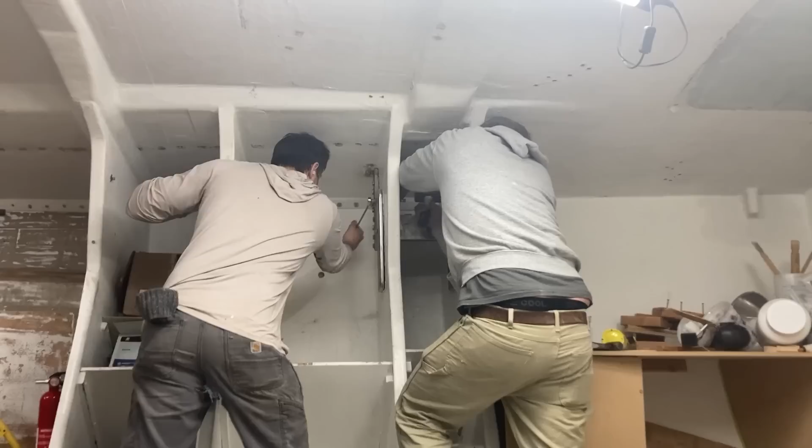A few months ago, we removed the original chain plates. These were giant, heavy stainless steel plates that supported a very heavy mast. Nice job. That mast was lost at sea almost 30 years ago. It was very stout, built for racing Duracell hard around the world in extreme conditions.

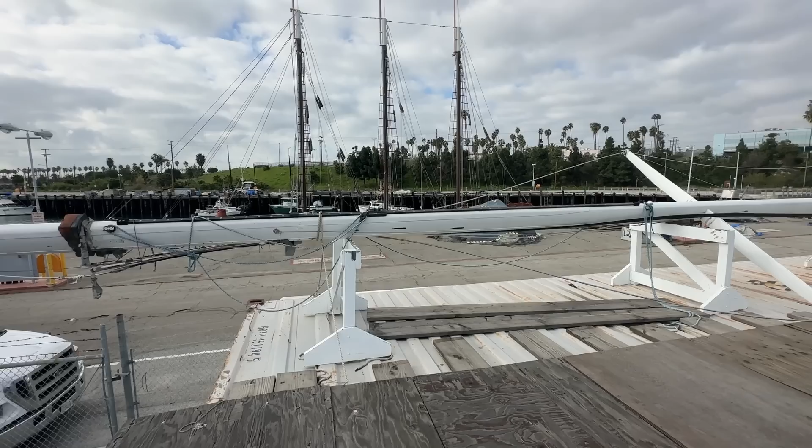Now we've bought a new mast for Duracell. This mast is about 50% lighter than the original mast was. This means that the walls are thinner and the section is smaller than the original mast. So we need to make adjustments to the rig to make it stronger.

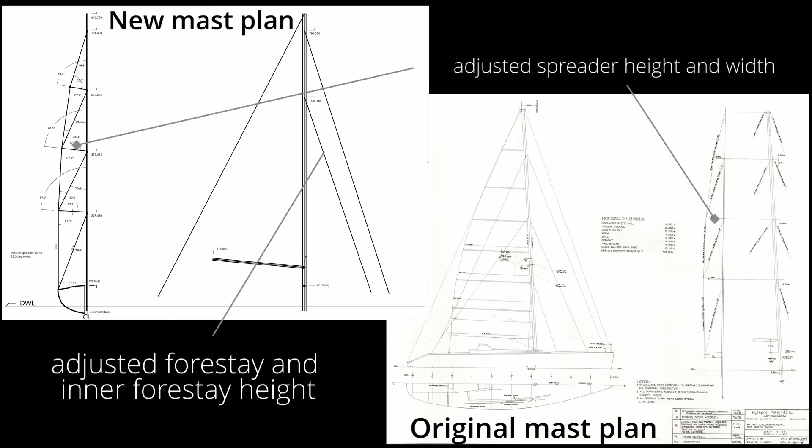Later, when we start working on the modifications that we'll be making to the mast, spreaders, and rigging, we'll get into the specifics of how we're making the whole thing stronger. For now, we're going to just talk about how changing the placement of the chain plates will help make the mast more sturdy in the boat.

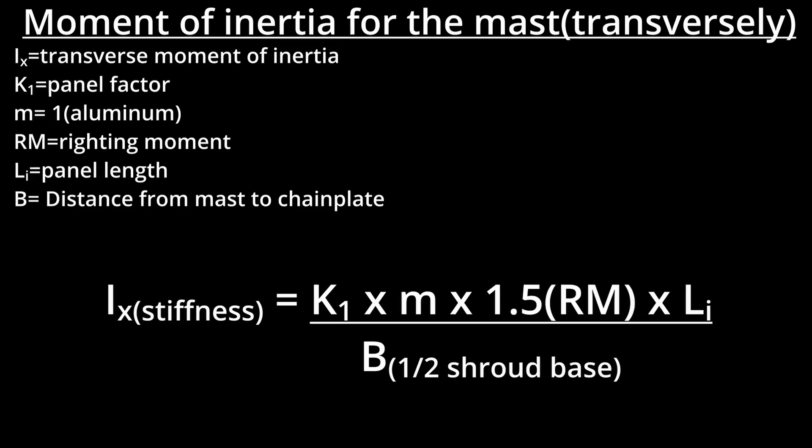To figure out how strong or stiff a mast needs to be, one of the factors is the distance between the center of the mast and the chain plate. In this formula, which calculates the area moment of inertia of a mast, the B distance is the divisor. So obviously as the B distance goes up, the required area moment of inertia or stiffness of the mast goes down. So by moving the chain plates as far outboard as possible, we are essentially making the mast more stable without increasing the weight of the mast.

This is the position of the original chain plate, and we are moving it outboard to the rail. By increasing the shroud base, we are making a compromise. We will lose the ability to use a genoa for hard upwind sailing because the shroud base will be too wide for a sail to pass by for a good upwind sheeting angle. So instead of using large genoas for upwind sailing like this, we will be using smaller, easier to tack non-overlapping jibs like this one.

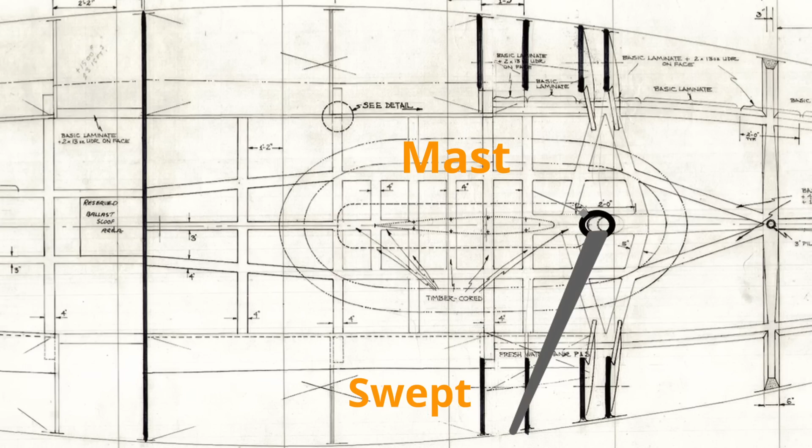And not only are we moving the chain plate outboard, we're also moving it aft. This means we are changing the mast from an inline orientation to a swept spreader rig orientation. The spreaders on the original Duracell mast and the spreaders on the new mast were both inline and very similar dimensions. In fact, it would be a lot easier for us just to stick this new mast in with its original spreaders, in the same spot as the old mast.

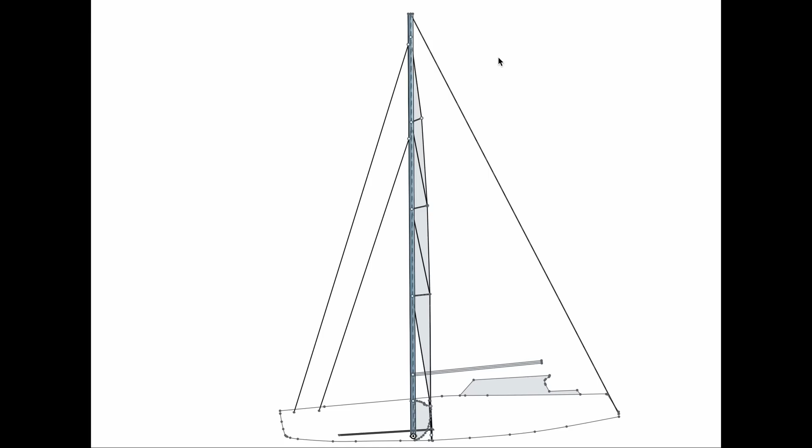But having inline spreaders with a mast this huge requires that we use runners to keep the mast in column. That would mean every time we tack or jibe, an extra step has to be done in the cockpit to release the old runner and take on the new runner. And in really heavy going, doing this wrong could essentially mean losing the mast. By sweeping the spreaders aft, we are basically changing the shroud base to more of a tripod, and this permanently stabilizes the mast aft so running backs won't be necessary.

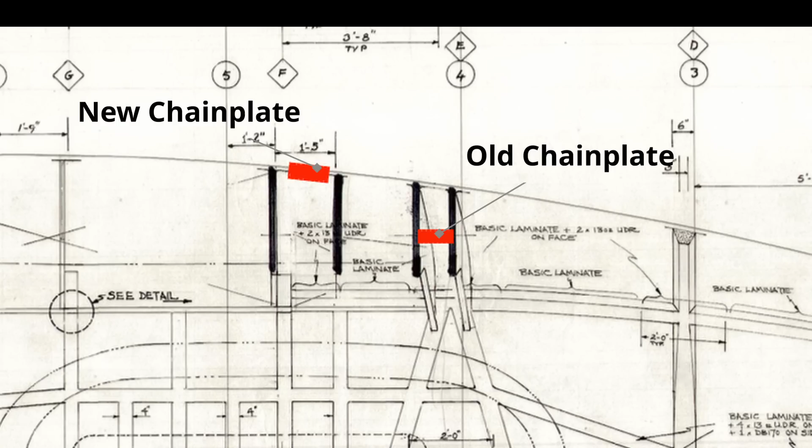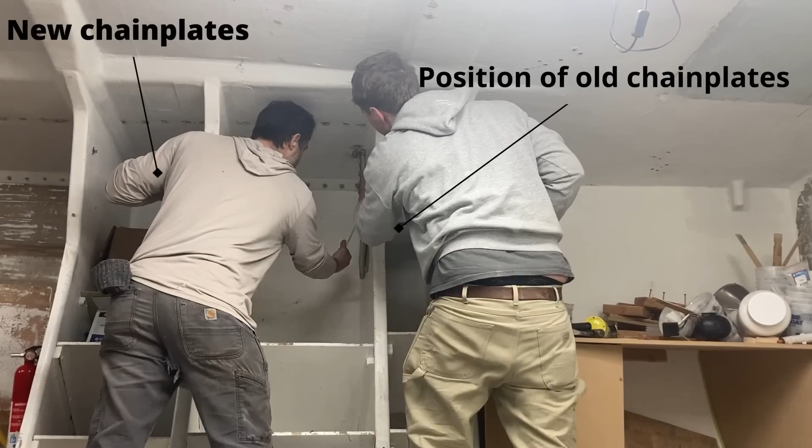So, we're building chain plates that are as far outboard as possible in the most reasonable part of the boat's existing structure. There are already 2 ring frames that are a perfect place for the chain plates to go. And no, we're not casting our own new stainless steel plates, we're building carbon fiber chain plates.

Now if that was too in the weeds for you, no worries. The short of it is that we are going to be doing a lot of work to modify the mast and the chain plates to make them stronger, lighter, easier to maintain, easier to use, and ultimately safer.

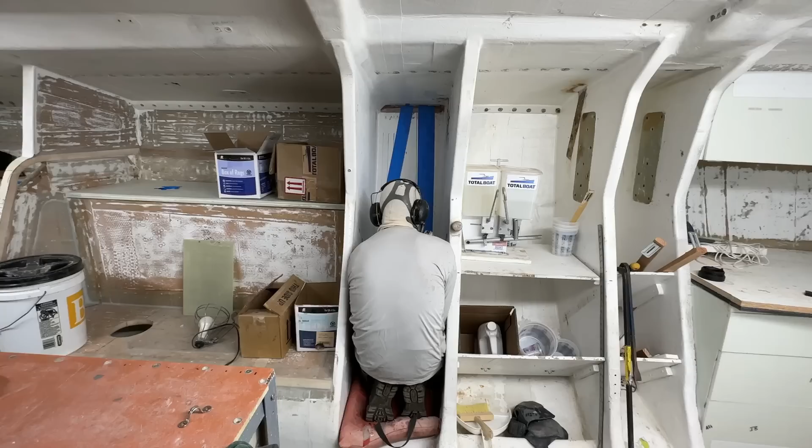Tonight, finally, I get to do some invasive surgery on the boat, something I've been planning for a long time. The hull of Duracell is sandwich core construction, which means that there are 2 layers of fiberglass separated by foam. At the area where the chain plates will be installed, I'm going to change the hull to be a solid fiberglass. So I have to peel off the inside skin of fiberglass, exposing the foam, and then remove the foam so that we can laminate a whole bunch of fiberglass.

Okay, so I've cut around the perimeter of the inside of the area, just through the inside skin, and so now I'm going to be attempting to peel off this inside skin of fiberglass, or peel it off from the foam.

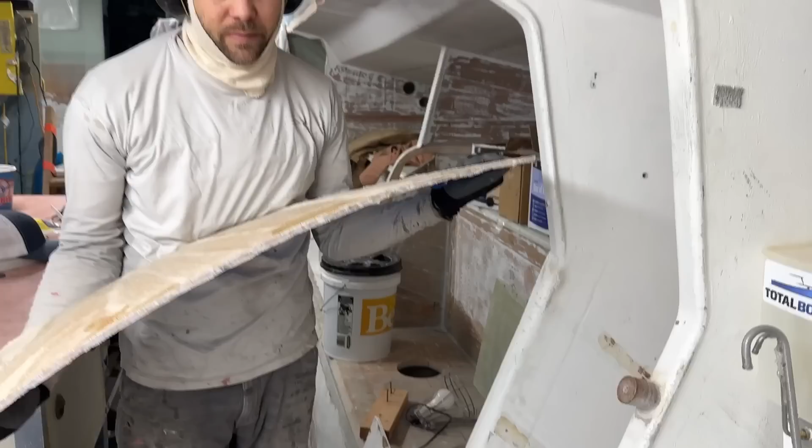Well-built boat if you can't tear it apart that easily. Yeah. You did it. Sweet. Victory is yours. That's right.

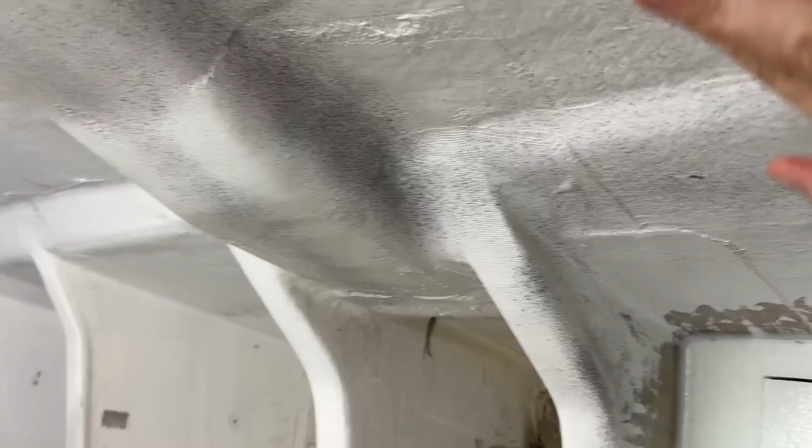I feel like we need to assure Duracell that this is all for a good cause. This was very invasive for Duracell. Yeah, it is. It is a very invasive surgery, but in the end, it will be stronger. It's okay, old girl. This is for a good cause. This is for your new mast, so you can go sailing once more. Cool.

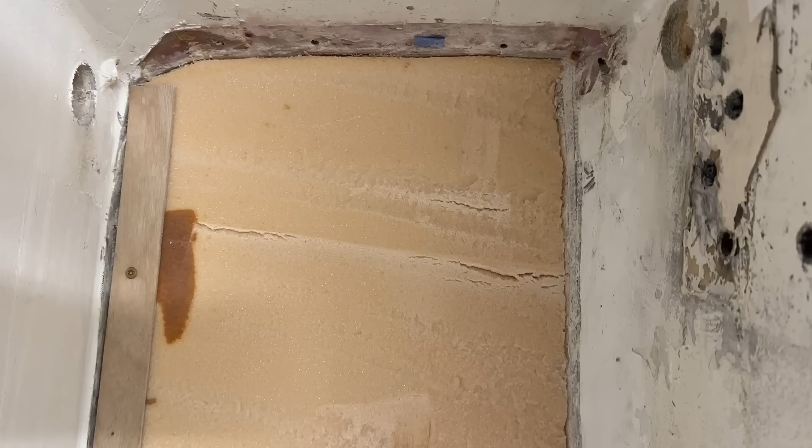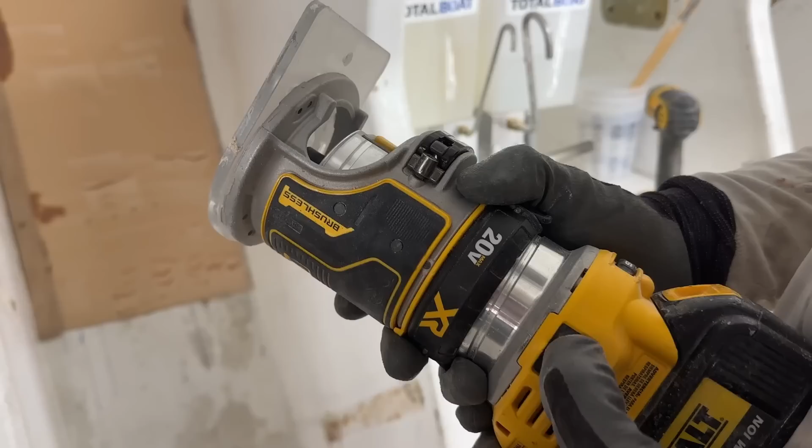Last night we cut off the inside skin of fiberglass and then peeled it off, and so what's remaining is the foam core, and then there's the fiberglass skin that's on the outside of the boat. And so what I have to do next is remove this core. This boat is built with sandwich core construction, so there's fiberglass on the inside and the outside separated by a layer of foam. This foam is 1 inch thick PVC Airex foam is what it's called.

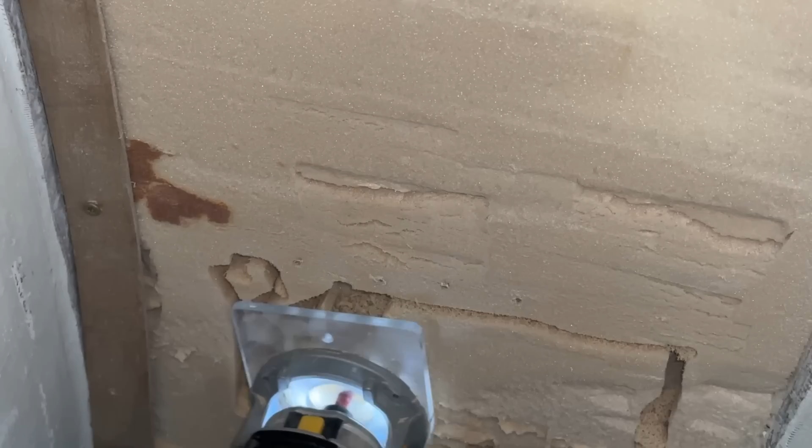So I take my router and I'm just going to buzz around and try and get as much of it out as I can with my router, and then use the chisel to get the rest of it out. Move on to the next section.

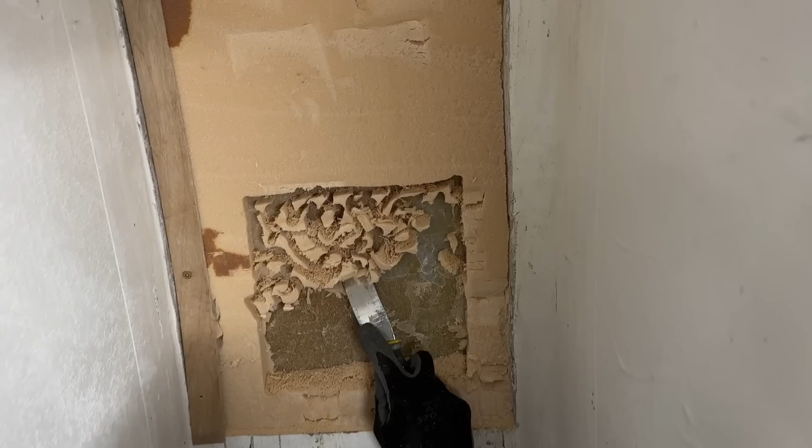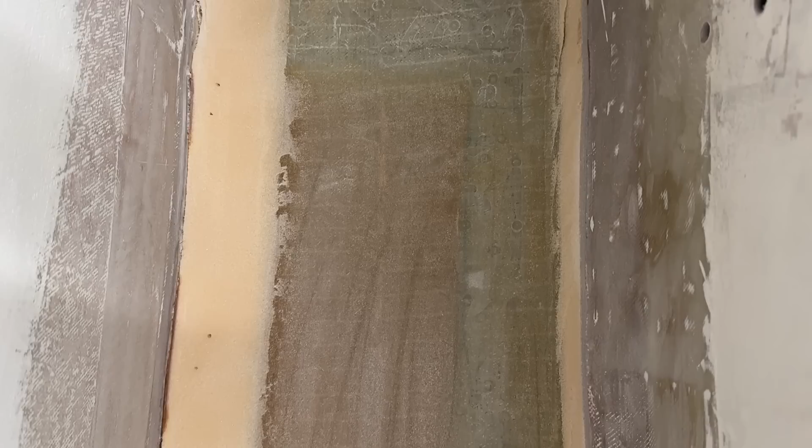So I use my router to get the foam out. What I've done now is I've shaped this foam that's left here, and what's left is tapered so that it will help transition the new fiberglass that's going to be laid in there from the hull skin on the outside to the ring frame. And so the next step is to build up the thickness of the hull to basically connect the two skins, the inside and the outside skin, together to make the hull solid fiberglass between these two ring frames.

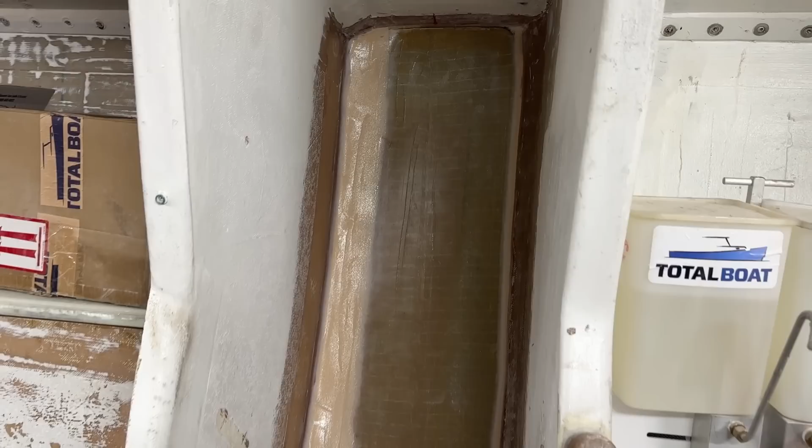Okay, so we're ready to do this first lamination. What we're applying is 15 layers of fiberglass to this outside fiberglass skin of the hull. As you can see, we've removed the inside skin, removed the core. We've shaped the remaining core that's there to transfer fiberglass from the outside skin to the ring frames. And I've swept it with thickened epoxy. And so it's all ready to go.

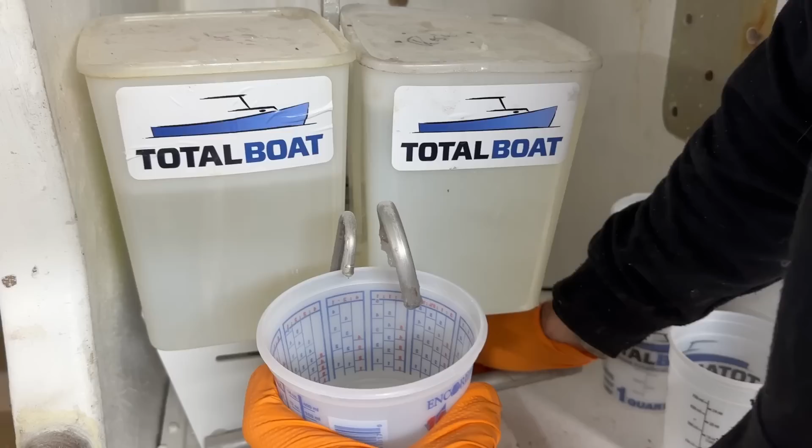15 layers is a lot to put on. The risk is that with 15 layers of fiberglass, it's so heavy that it starts sliding down the inside of the hull. And so what we're going to attempt to do is squeegee as much epoxy out of the fiberglass after it's been absorbed, so that it's as light as possible. There's a chance that we get halfway through and we decide that that's enough, and we put the vacuum bag on it and then do the rest of it tomorrow.

So my mom is here to give me a hand. Thank goodness, because it's really good to have 2 sets of hands for this one especially. Yep. So, yeah, hope it goes well.

Do you think we'll set the record for most epoxy used yet on a sailboat in one day? I don't know. When we did the roof, or, I just lost count, sorry. When we did the roof or when we did the traveler bulkhead, those projects used a lot of epoxy as well.

The process for this project was to wet out 2 or 3 layers of fiberglass on the table on top of each other with the squeegee. Then we'd lay a piece of thick plastic over the epoxy absorbed fiberglass and press as much excess epoxy out of the fiberglass as we could. The plastic helps hold the shape of the fiberglass, since biaxial fiberglass tends to warp really easily. Then we'd pull the laminates with the plastic up all together, again so that the fiberglass holds its shape, and then stick it up in position.

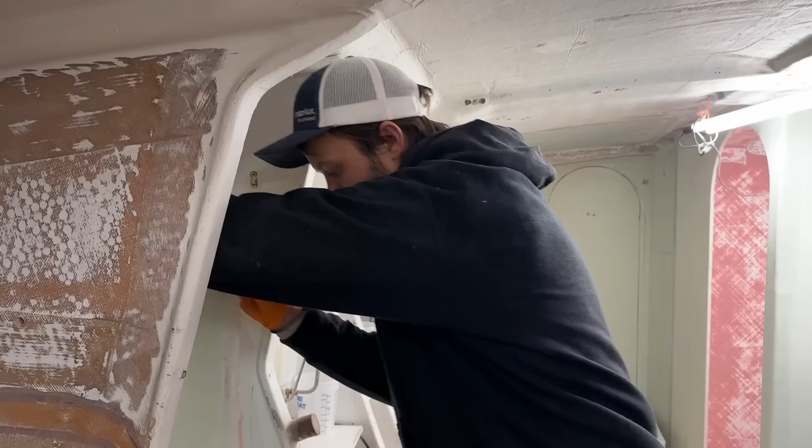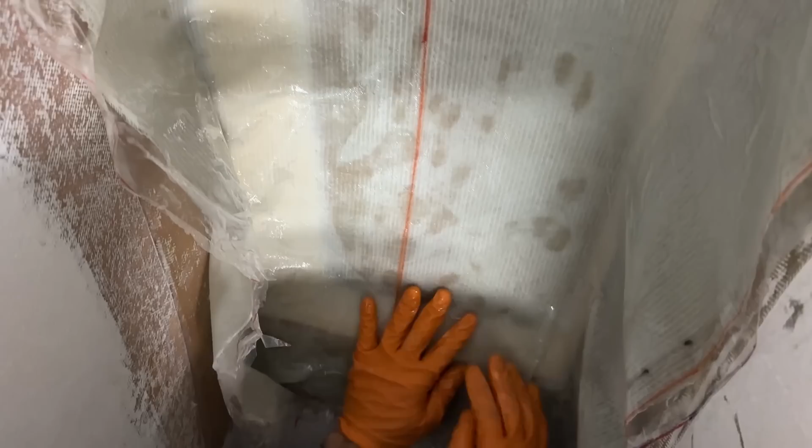Then I'd pull off the plastic to be reused on the next layers and roll out as many of the air bubbles as possible before moving on to the next layers of fiberglass.

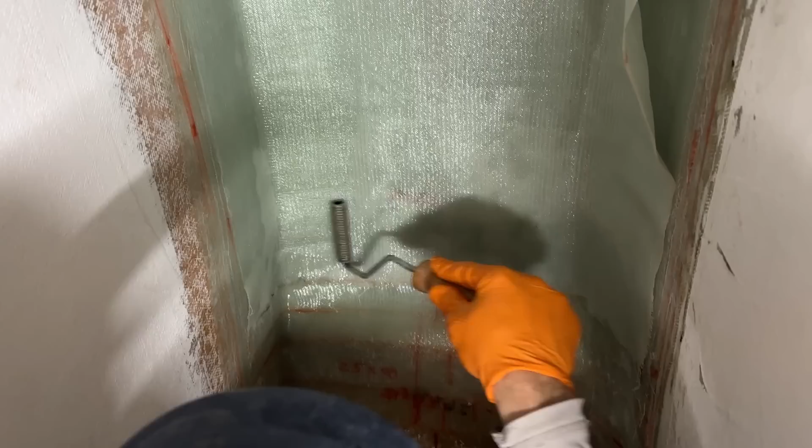Laminating all 15 layers in one go went surprisingly well. The slow cure TotalBoat High Performance epoxy is great for projects like this where a lot of laminates are used. I couldn't have got them done without the help of my mom wetting out all the layers as we went, and squeegeeing out excess epoxy before laying up worked great for keeping the layup from getting too heavy. Overall, it was a great project.

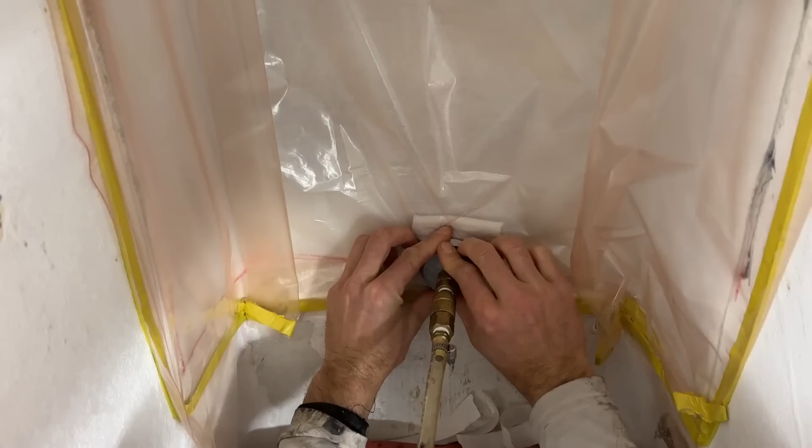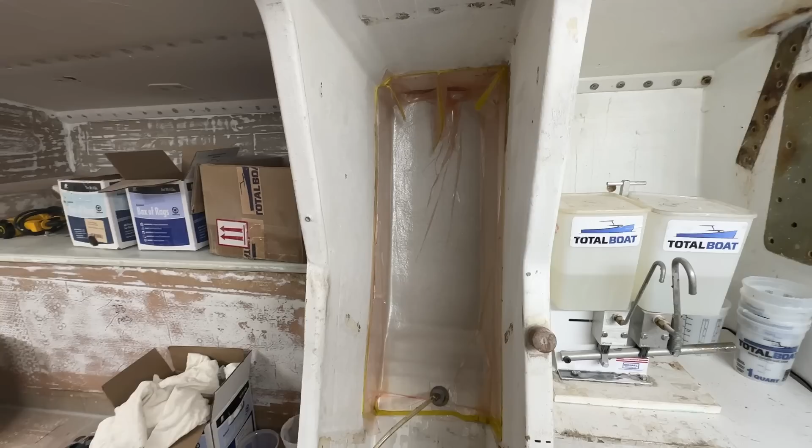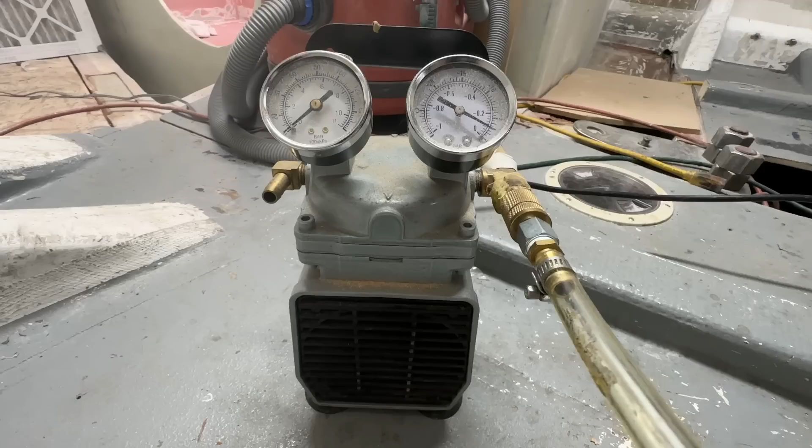Looks amazing. Feels amazing. This is like step 1 of about 1 million for this project. The first lamination is done on both sides. It's turned out really, really well. We now have a nice blank slate to build the chain plates onto.

Next week, we'll start working on actually building the chain plates. We'll also talk a lot about how we came up with the design for the chain plates. We're going to talk to Evan, the naval architect, who has been instrumental in getting this project going. We're really looking forward to this project. It's going to be a fun one.